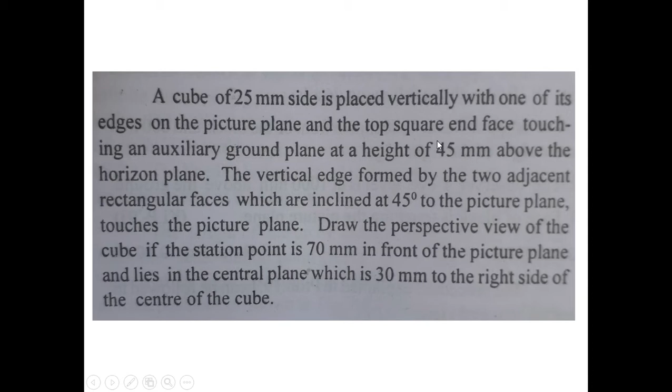Now we will see how to draw the perspective projection. First we have to draw the front and top view. Since it's a cube of 25 mm edge, and it is given that one edge is touching the picture plane, you draw the picture plane, and AE is the edge which touches the picture plane. Also these nearby faces are inclined 45 degrees.

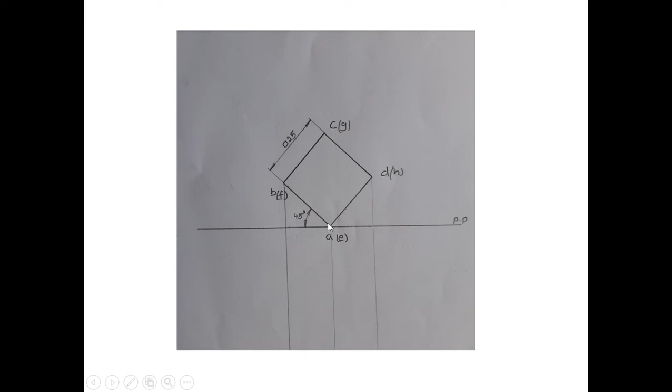So you can draw a cube like this, a square. The top view will be a square of 25 mm with these two faces inclined 45 degrees. You can draw one line at 45 degrees at 25 mm, then you can complete that square. This is the top view of the cube. Then you can drop all the points to the auxiliary ground plane like this.

Now it is not the ground plane but an auxiliary ground plane, and the top face of the object is touching the auxiliary ground plane. That means the object is hanging downwards like this, not above. It is not resting on the auxiliary ground plane, but it is hanging downwards because the top face is touching the auxiliary ground plane. That means the object front view will be below like this.

So here in this case, A, B, C, D are the top points, and E, F, G, H are the bottom points. So you can see here in the front view, A, B, C, D will be the points marked.

A, B, C, D are the points which are touching the auxiliary ground plane, whereas the other points E, F, G, H are the bottom points that you can see in front view. You can see that as marked here. So one thing is that you have to draw the auxiliary ground plane, and the object is hanging downwards, not upwards. Okay.

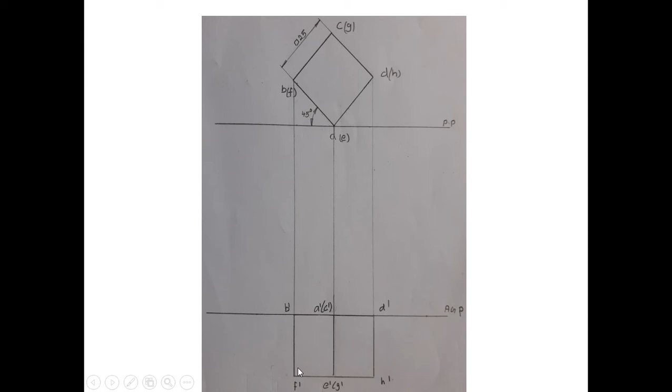Now then we have to draw the center plane. To mark the station point, it is given that the station point is 30 mm to the right. So from this geometrical center of the object, you mark 30 mm towards the right, then draw a line. Then it's also given that the station point is 75 mm in front of the picture plane, so you can mark 75 mm in front of the picture plane.

And also it is given that the auxiliary ground plane is 45 mm above the horizon plane. That means the station point is 45 mm below the auxiliary ground plane. So the auxiliary ground plane is below, and the object is hanging like this. So from here the observer is observing the object.

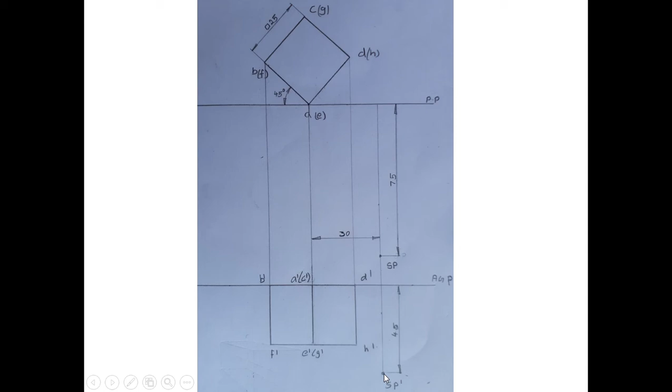Now after drawing the front view, top view and station point, we just connect all these corners like this in top view and front view to get the top view and front view of the rays of vision. Just connect SP to the top view and SP dash to the front view. Now after drawing those rays of vision, you will get the piercing points here, 2 points here, 2 points here, 2 points here, and 2 points here.

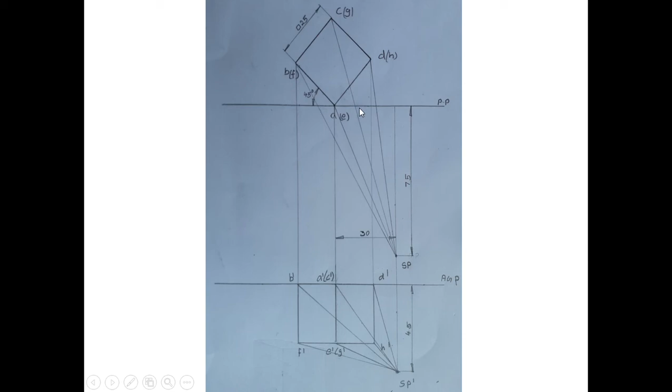Then you drop that to the corresponding line. Then you will get certain points. You mark them as A, B, C, D, and E, F, G, H like this. This is for B and F, so you are dropping that to B and F. Same way, this is A and E, so A and E will be on the same line. Then this is for C and G, so you will get C and G here, and this is for D and H, so D and H.

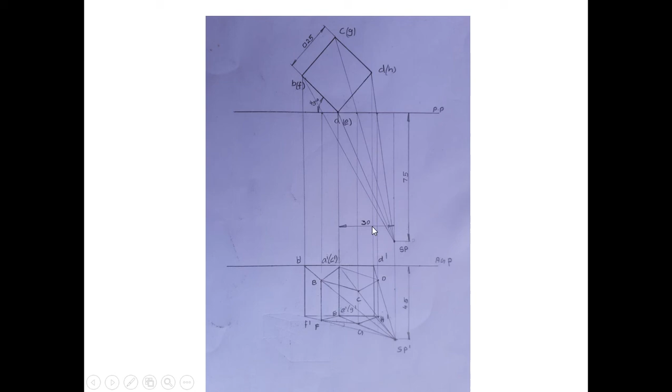Now in this case you should know that the station point is in front and below the object. So this is the top view of the station point. If the observer is observing the object from here, you can easily understand these two points are the two extremes. That means the point which is behind will be invisible. So these 7 points will be visible, and 1 point will be invisible.

Now since the station point is below the object, that means the bottom face will be visible, so G will be visible. You can see in this diagram G is the bottom point and C is the top point. Since in front view the station point is below the object, G is the point which is below, and C is the point which is above. That means C will be invisible because the station point is below the object. The bottom face will be visible and the top face will be invisible.

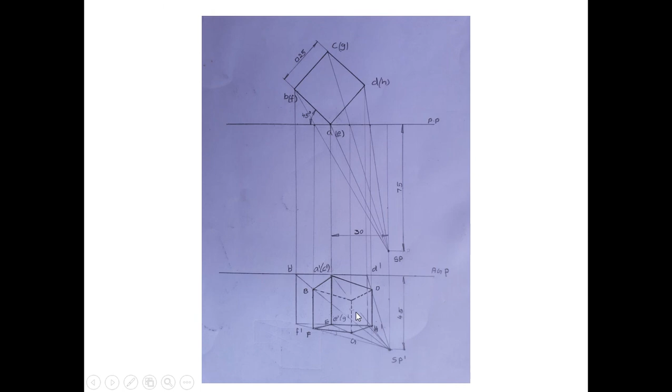So on the top face, the point will be C, so C will be invisible. So you mark C as a hidden point, and the lines CB, CD and CG will be invisible. Then you also mark the axis of the object. Then you will get the perspective projection.